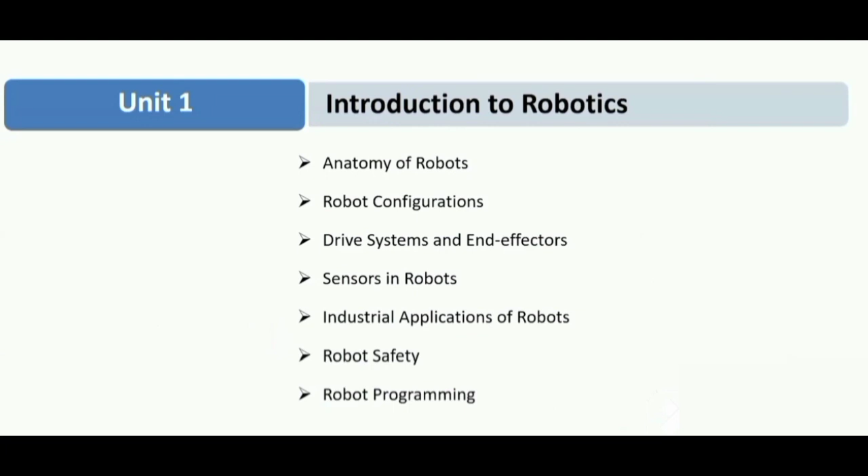Introduction to robotics, particularly focusing on the significance of the industrial robot in modern manufacturing industries. This statement holds good for any time: robotics is a technology with a future, and it's a technology for the future.

Hereafter, in another 5 or 10 years, even a robot could be placed in our home. We are going to interact with robots at different places - it could be in malls, shops, or sometimes in our home. So there are more possibilities and more scope for development in this field of robotics.

In this section, I will try to present how well it is progressing, what level of evolution has been taking place, and where we are going to place ourselves in this development. There is surely a scope for building our skill sets in different domains of our interest, and we can proceed further.

I'm sure robotics has a major requirement from mechanical engineers because they will be moving objects and interacting with objects physically, which needs to be taught to that robot. This requires some kind of programming and electrical aspect. We are supposed to be exposed to some electrical and electronic concepts, but we will be driving this total scenario particularly as far as manufacturing is concerned.

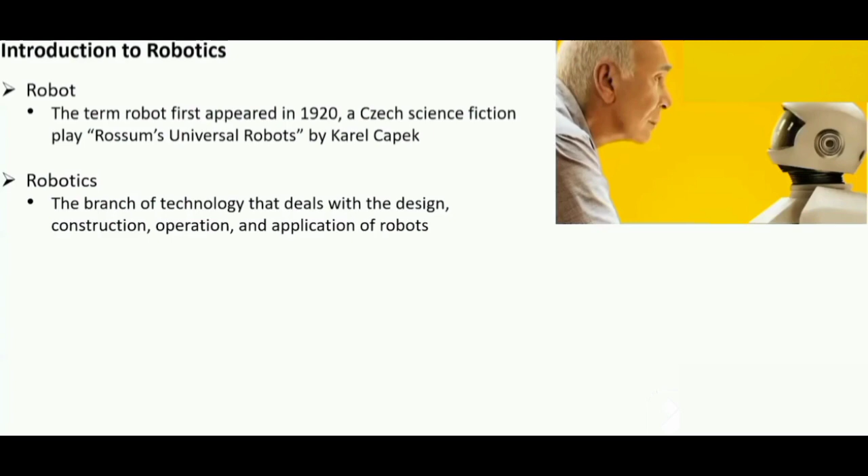So with the continuation of this, another writer named Isaac Asimov has declared some kind of three rules or three laws of robotics, which makes it clear how the robot has to be.

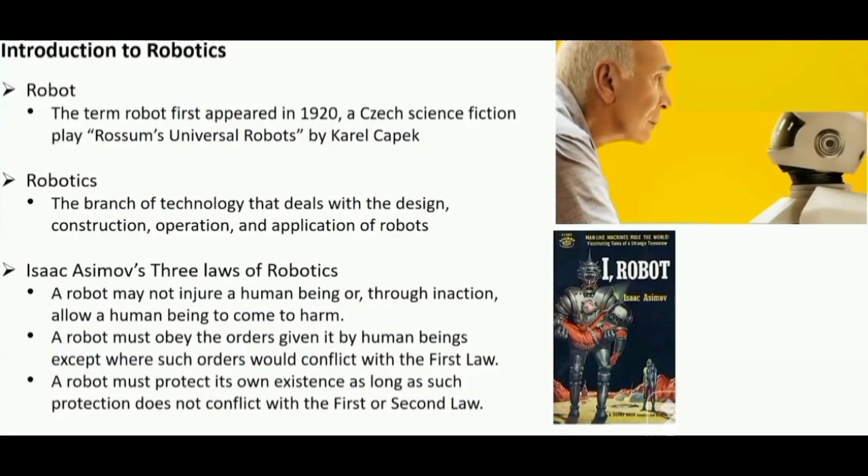So with this aspect in mind, the robot is progressing. The robotics technology is progressing. With that, plenty of robots have been deployed in manufacturing, and this too is considered to be a programmable machine.

I hope that you have all undergone, in the 5th and 7th semester, courses on manufacturing automation, where the CNC machines, NC and CNC machines, the machines will be coded with NC codes or programming, and it will be made to work for our machining purpose.

Can anyone suggest to me what is the need for using CNC in manufacturing? Particularly, why is automation needed? That's an inherent question. Why do we need to use CNC instead of our traditional methods?

Okay, good, very good. Good surface finish, accuracy, exactly. That is, manpower, speed up the process, accuracy, and also we need to meet up the demand of the market and the requirement. So this requires us to trade off between accuracy, quality, and time.

And it's supposed to have a better quality product in a cost-effective way. That's why the market requires exactly this. So it's going to be more cost-effective solutions. We are expecting cost-effective solutions in a shorter time, which avoids some kind of inaccuracies that happen with manual intervention.

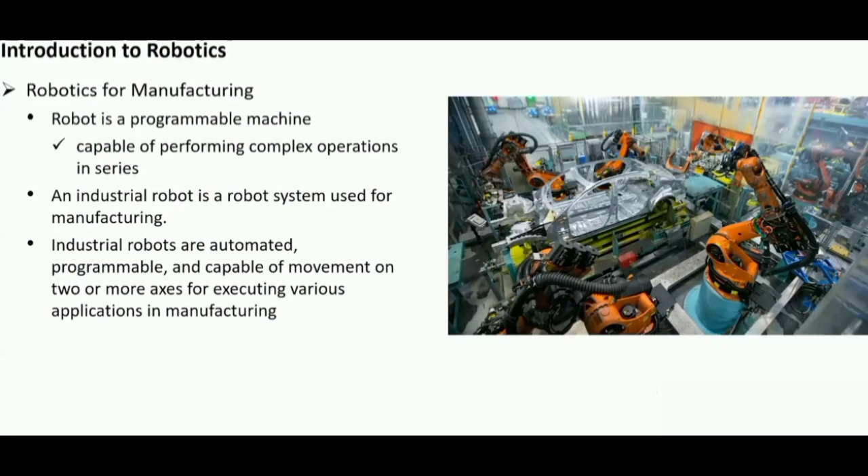So with that, we are going to have an industrial robot that is automated, programmable, and capable of movement on two or more axes for executing various applications in manufacturing. The robots could be placed in different formats. However, this course is focusing on manufacturing, prior to the simulation part. Robotic Industries Association is a very renowned institute in the area of robotics.

We are more focused on industrial robots, the robots used for industry requirements. An industrial robot is a reprogrammable, multifunctional manipulator designed to move materials, parts, tools, or special devices through variable programmed motions for the performance of a variety of tasks.

We need to recollect this statement as much as possible to justify it. The first part is reprogrammable, so it's programmable and can be reprogrammed, meaning it can be used multiple times with different kinds of programs enabled. The second part is multifunctional, meaning it can perform different functions like pick and place, welding, or any other activity depending on the task required.

It is particularly designed to move materials, parts, tools, and special devices. It's more like a material handling system, but with precision and accuracy much better than a human. So safety is a fundamental underlying principle, along with variable programmed motions, since different motions need to be executed for each part or task to be performed, for the performance of a variety of tasks.

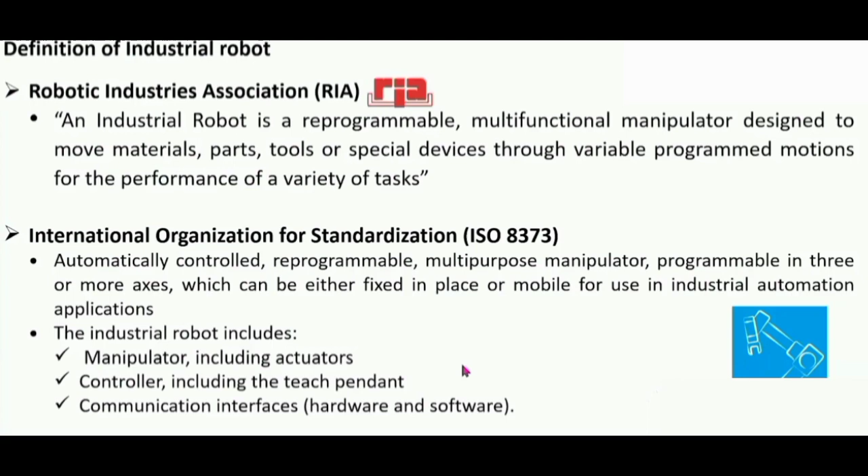That's the way we have to structure this robot. So in this case, okay, I can start up the presentation. Yes, okay.

I hope that I have convinced what a robot will look like. We are taught it's a very simple thing: a programmable machine that imitates the actions or appearance of an intelligent creature, particularly human. Wherever humans have been employed, we use some kind of automated device called a robot, because humans find it difficult to do things like welding or carrying heavy objects. There we need support from machines. So in order to qualify as a robot, four major elements have been considered.

This is going to be the simplest version of it, though a larger list exists. I prefer to have these four things. One thing is sensing and perception - simply, how we get information from the surroundings.

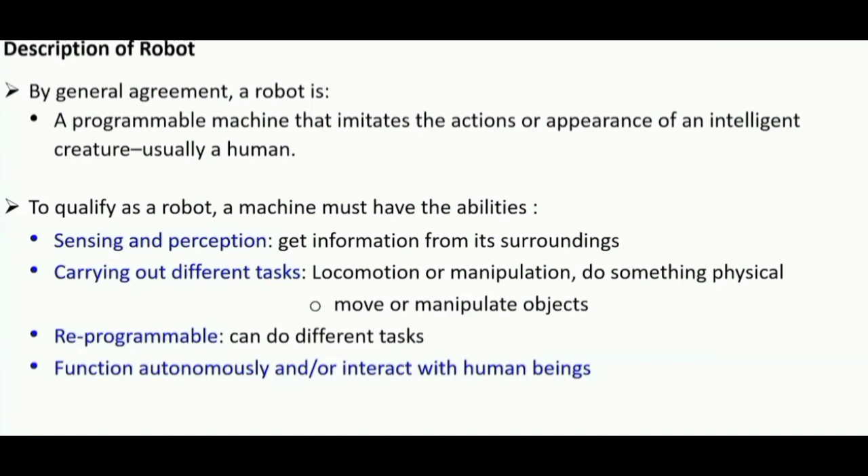So how will this robotic structure look like? I have provided a very elementary level of structure, but it will be predominant in most of the cases.

You can see that there is an environmental sensor, something called a motion planner. The other thing is a controller. This environmental sensor collects the data, processes the information, and gives it to the controller.

The controller operates the mechanical structure, like the arm, and within that there is a configuration sensor.

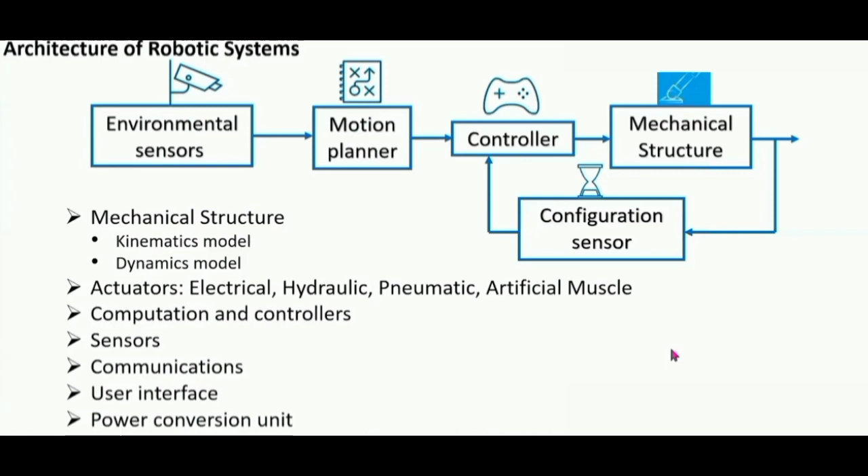As already discussed, now to ensure, in terms of the industrial perspective, any industry is looking for quality products and in a more efficient manner, without harming or without any adverse effect, with minimum time and minimum cost.

So in order to have a better benefit out of it, there needs to be better productivity. So much of our requirement for industry is concerned with one thing: it has to increase the product quality in terms of improving accuracy and repeatability, so that the quality of products will be saleable at the market and has a better rapport or branding.

The second one is how effectively they will be improving efficiency so that their workers or employees will be comfortable and able to undergo any dynamic situation, in a very safe and environmentally viable environment.

And we need to reduce the cost by reducing wastages in terms of scrap, reducing our in-process inventory, and reducing labor cost. The very important critical factor is reducing the manufacturing lead time.

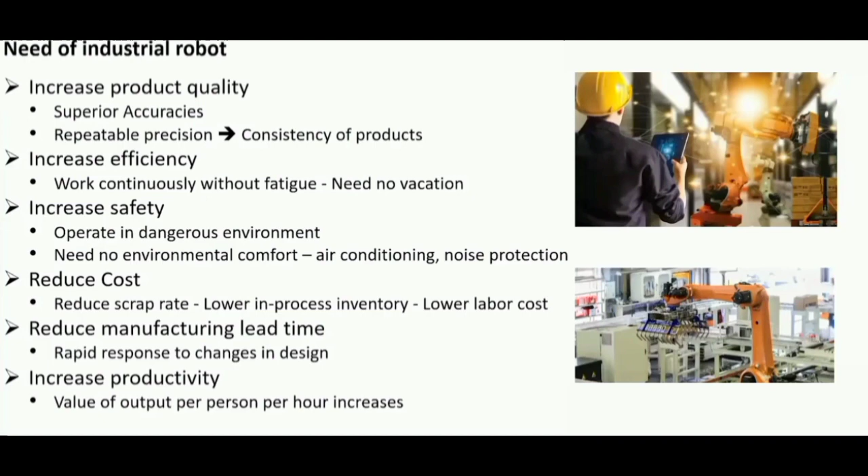We are also looking for the replacement of repetitive, ergonomically difficult, physically demanding, and sometimes dangerous work. Wherever humans undergo fatigue in nature, we can deploy a robot, which is a machine that works 24/7 on requirement, but the human cannot do because they have their own fatigue and physical conditions.

So robots are preferred wherever dangerous, dirty, dull, and difficult environments will be helpful for humans, in terms of automation purposes, or supporting in terms of assistance or augmentation, or it could act autonomously also. Some industries may not need human intervention for night shifts; all the machines will take care of themselves and work on, and whenever we require, we will be on the regular routine time and take care of it.

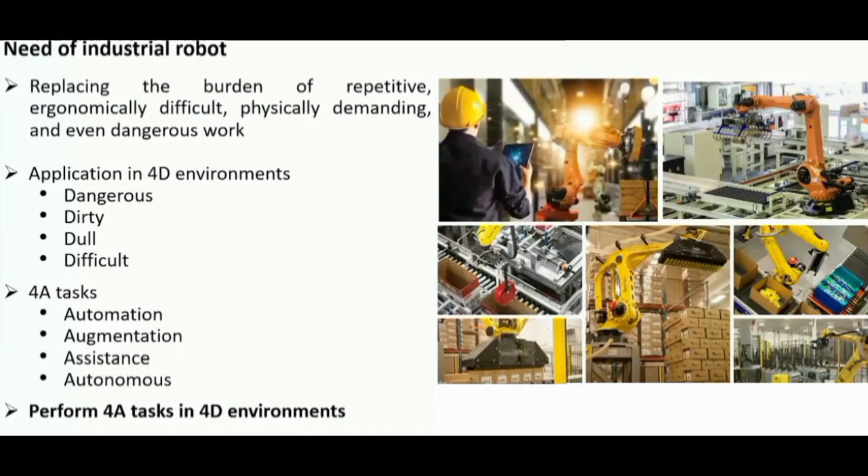So we like to perform 4A - automation, augmentation, assistance, and autonomous tasks - in a 4D environment, meaning dangerous, dirty, dull, and difficult. To have a replacement as well as betterment of human value and human work, we'll be preferring the industrial robot.

For example, assume there is a painting section. When you are deploying or employing a human worker in a painting shop, it's going to be a very enclosed environment and they are subjected to issues like respiratory ailments, maybe as a result of this kind of painting shop.

So there's going to be a booth available for interior and exterior, and the robot will be placed appropriately to do its work. Here the productivity will also improve, and the human also benefits more in this kind of category. So certainly this kind of environment prefers to have the industrial robot. Surely the quality also improves, and the amount of paint spent on this process could also be reduced.

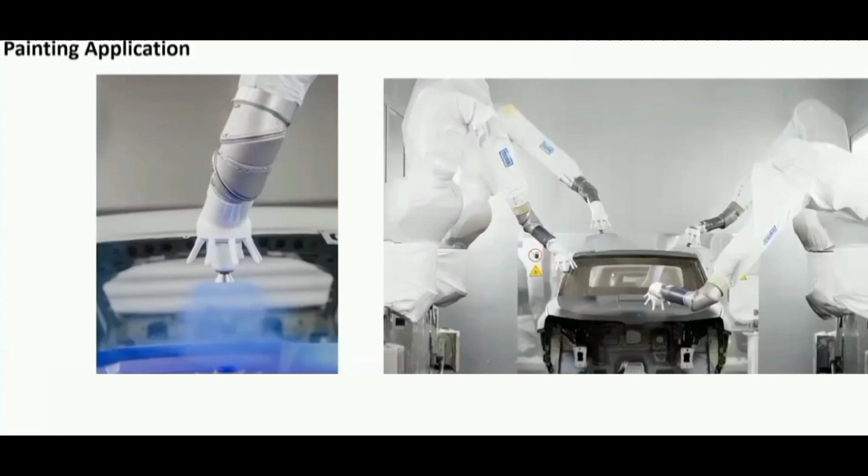Now that's part of why we are using a robot. Now we are going to set ourselves into a global environment and try to see what the statistics are. The International Federation of Robotics report of 2022 collected data in 2021 and released it in 2022.

This is the growth of installations in terms of thousands of units. You can see there's a huge increase, particularly in the Asia and Australia regions, because of the increase in their productivity as well as the manufacturing sector. Annually it has been maintained more or less. This may be the recession area and also the COVID period, where we were slightly lower, but it still exists. Even in this pandemic environment, robots have been supporting us in manufacturing, and whatever support was required has been extended by this kind of automated industry.

So this is a very simple arrangement. You can see the consistency has been maintained in most of the European countries, and because of this increase, they are also slightly increasing their abilities. Whereas as far as America is concerned, they have already established some things, but they are sustaining it.

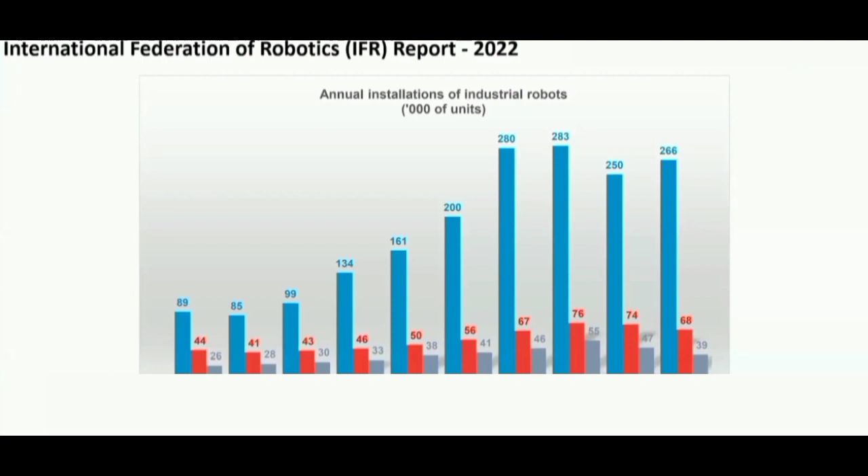So this is an environment where we can place India in this area. We have enhanced a little bit, but compared to China, Germany, or Korea, our usage of industrial robots is minimal. But in future, as the country grows, we are looking for more efforts on manufacturing. So when going for high precision manufacturing, we need support from industrial robots. Purchasing an industrial robot alone is not sufficient — we need to build capacity. You, the future engineers, are going to handle these kinds of robots in new digital manufacturing environments.

And the other part is which sector of manufacturing will dominate. Here you can see the electrical and electronics companies, like chipboard manufacturers or any process manufacturing, which require very precise positioning and precise assembly, needing more dexterity and fine motion where human skills are limited, will go forward with industrial robots.

The other evergreen segment is the automotive sector, where they have started using industrial robots because of market demand, and precision and mass production requirements are driving it. The next is the metal and machinery part, and there is scope for the food industries, chemical industries, and others too. These are very authentic evidence.

This is a report for 2022. Still, there can be a huge scope for improvement, and the installation is going to improve a lot.

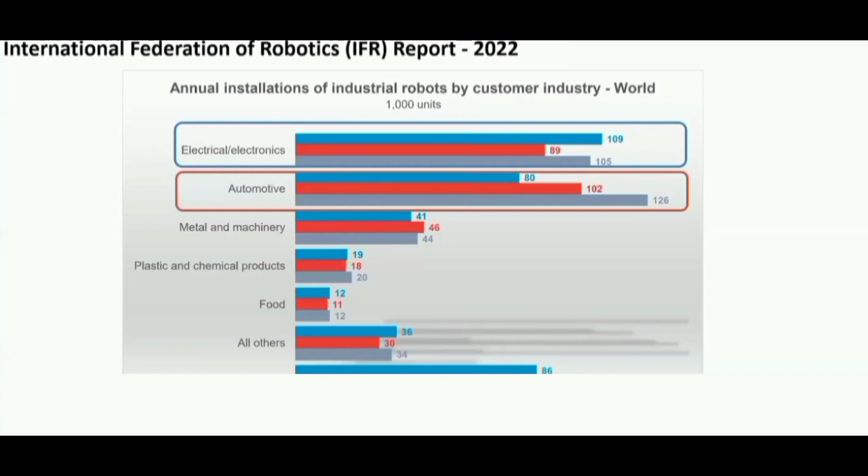Very quick glance of it — whatever we have seen in the video, the same thing: 76% of global installations are in countries dominating manufacturing, particularly China, Japan, USA, Korea, and Germany. Out of which, China is moving on with 44% of total installation in 2020, which is going to be 58%, more than Europe and America have. So they are growing in a very accelerated manner, targeting the manufacturing hub, and building their capacity in terms of automation.

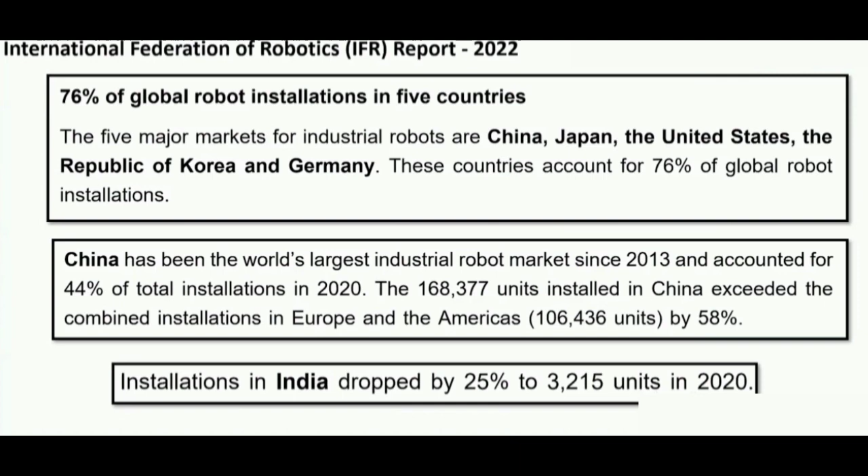However, the government has been taking up some effort and making toward new accelerated programs on robotics. I think you have heard about some kind of initiatives on the drones as well. So we are identifying some of the key areas, and we are going to equip ourselves towards it. So one of such programs could be of this online courses. It doesn't satisfy all the skill sets, but it provides you an awareness and a hands-on experience that makes us move from this place to the next level.

Very quick, important inferences. I have pointed out around 10 points here. Please listen carefully. That will make you move forward from here onwards.

The automation is driving the job creation. Okay, so automation is a key area coming up. However, the human labor will remain competitive based on the skill set we have, not in the traditional way, but also we need a digital way of doing it. There is a new skill set expected in the industries. If you are prepared for it, the human labor is still competitive.

Most experts in the three industries covered in this IFR report is mostly on manufacturing, logistics, and healthcare. Manufacturing is a major hub. Even the products produced for logistics and healthcare will be done at the manufacturing industries. So it's a very major domain in which we are looking for automation as well as precise, accurate parts. And we are going to start working along with the machines.

Hereafter, there will not be any barrier between that. We will start working along with these machines, in the sense the robots.

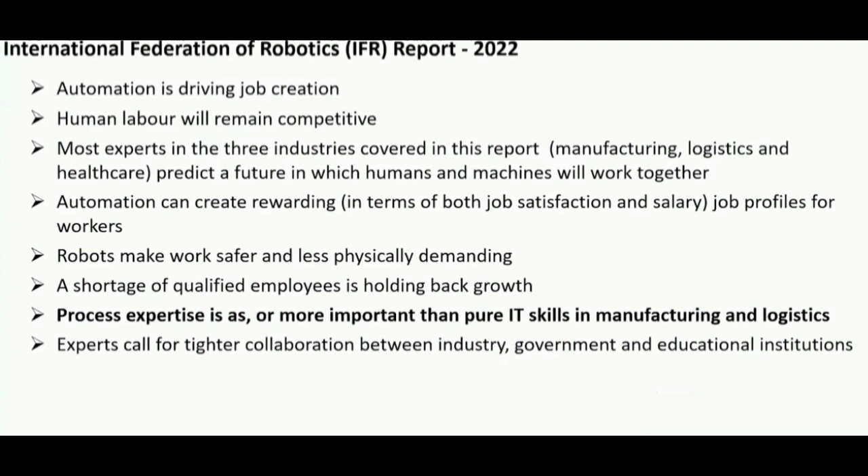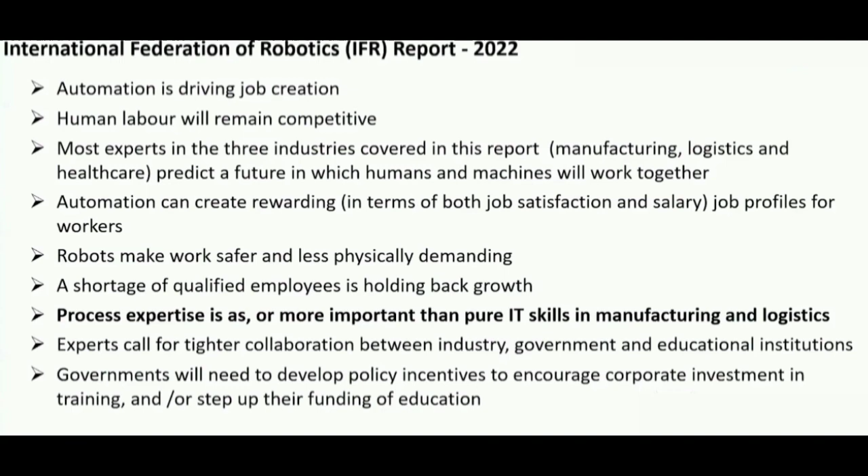The governments will need to develop policy incentives to encourage corporate investments in training and step up their funding for education. So one of the training institutes, Skillsonics, could be one of the persons taking this robotic initiative, and they are making this happen. So a more collaborative effort is expected that makes us drive to a new beginning.

Very simply, we are looking for the betterment of the manufacturing scenario in terms of efficiency, starting from raw material to packing, where the objects have to be handled at all places. And the robot can work 24/7 for continuous production, so that productivity could be improved upon. And the equipment will be highly flexible in terms of what functions we need to do; appropriate programming may be required.

The manufacturers start preferring robots because there is a lack of skilled labor now. At the same time, the market demands more precise, high quality products. On the competitiveness front, they need to go for this kind of extension activities.

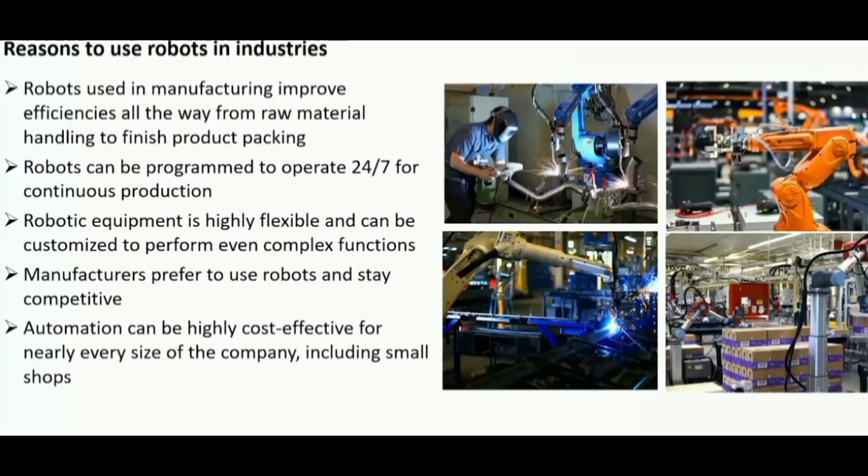So how well we are going to use these robots in a different format, and new innovations or improvements are expected out of you, for small scale industries to large scale industries. That will be one of the reasons we are here.

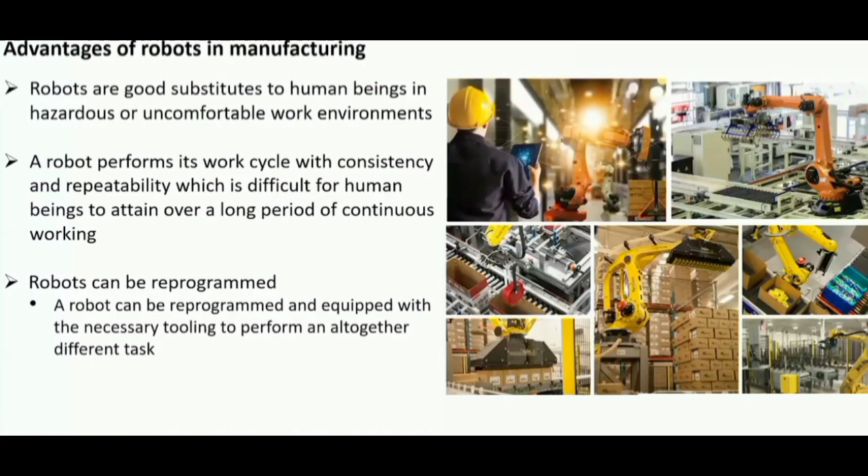So already we have touched upon these areas. We are focusing on a very simple thing: how well we are going to effectively use the human value, and how effectively we will extract the work from the machines, so that cost effectiveness, safety, and stability will be improved upon.

When talking in terms of manufacturing, we have a wide variety of manufacturing processes involved, and most of the processes can use robots, subject to how well it would be used based on the demand, based on the complexity of it. We need to devise appropriate programming or planning, whether we are going for a robot or can we do it manually.

It's more of a decision making process, which requires a systematic investigation and systematic study may be required. So for this we cannot directly deploy the robot. Instead, we will be seeing how well it will work if it is deployed.

That's why we are more focused towards the simulation part, where we can visualize all the working of it using a virtual environment, through the use of simple CAD packages or any robot-based packages, and we can see how it works. Upon satisfaction with the performance, we can start deploying it, and the deployment phase will also be reduced because of the simulation.

That's why this course has been more focused on robotic simulation for manufacturing. Our intention is more on the simulation part, that too a simplified version of robots. However, that could be extended to complex robots as well.

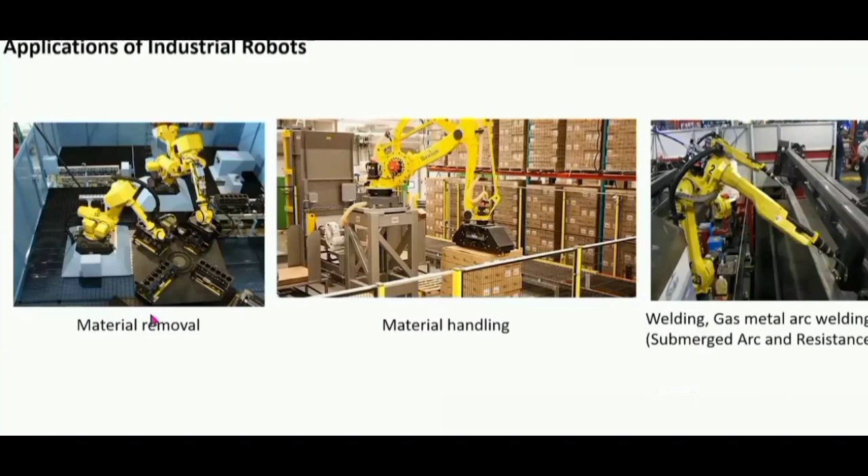We previously showed material removal, material handling, welding, and here the assembly part. You can see that in the automobile environment, there is a huge lineup of robots. All these robots need to be maintained, programmed, and coordinated so that the total flow is more effective.

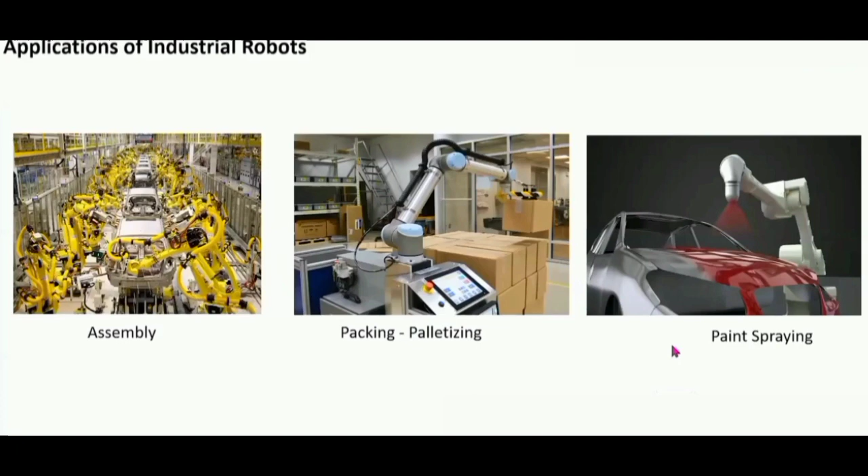So we have a wonderful opportunity to equip ourselves and be exposed to this environment, either automating or using a robot for any application - assembly, or maybe packing, or maybe paint spraying. So it could be devised for different aspects of it.

As one of the questions has been asked, what are the limitations of using robots? Surely there's a chance of increase in unemployment rate for existing skill sets, but there is a wider opening for new skill sets. So we need to equip ourselves for this new requirement.

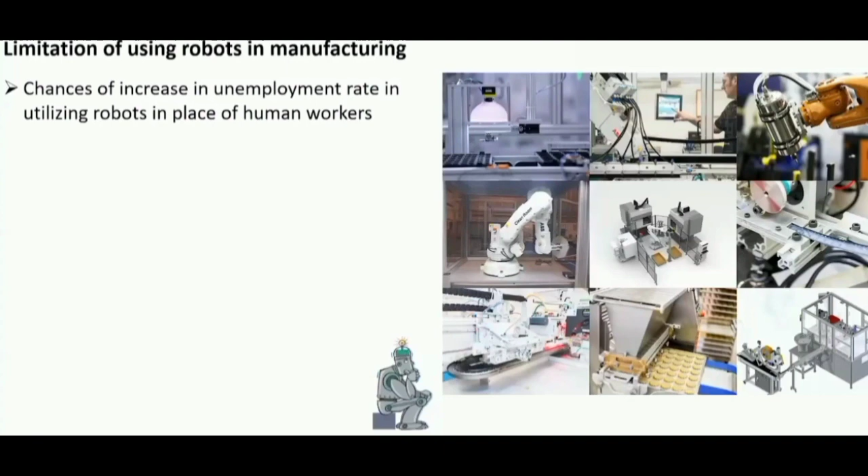This is a more dynamic environment, so how well we are going to adapt to these dynamic requirements matters. The cost of robotic automation may be difficult for an MSME. Small scale companies cannot afford it in terms of financial budget, and there will be regular maintenance required. If there is improper planning of the robot, that's a huge increase in expenses.

So there is a very wide scope for our planning and simulation, followed by execution. That requires some kind of skill set in terms of planning and the simulation part.

Humans execute tasks with creativity, decision making, adaptation, and job learning. In the sense, humans have better learning ability and better response to dynamic environments. Whereas the robot is concerned, it has been limited to that programmed level alone, where always the human will be dominating the robot. That's no doubt about it.

Employees dealing with robots require proper training, which is an additional cost for the company. Surely, when moving to new transitions or new developments, we require some kind of skilling. Skilling requires a training component, and that is also a small cost involved for the manufacturers. However, there's a need of the hour - we need to go for changes, adapting to the changes for a new beginning.

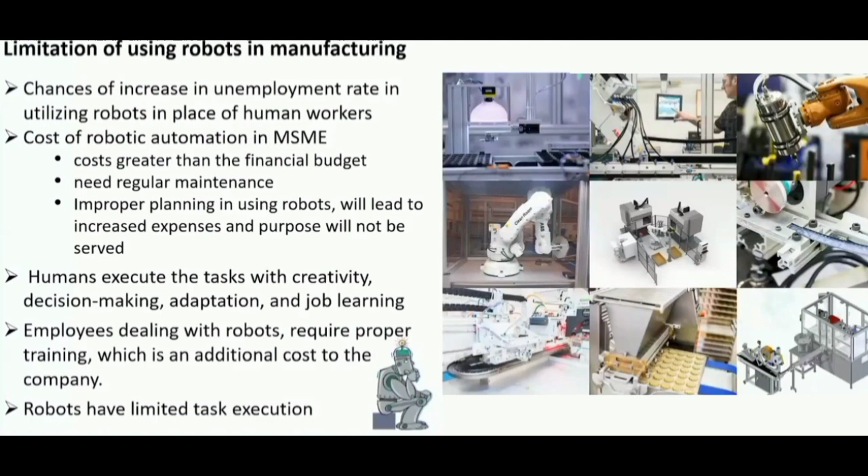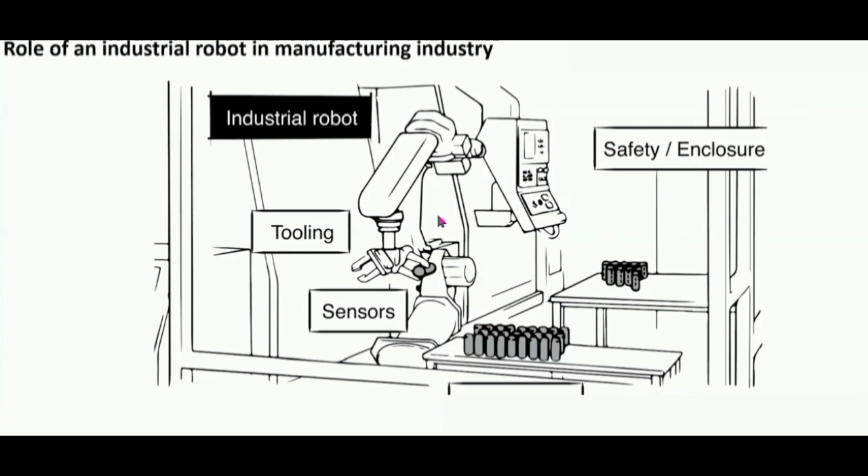Normally a human will be using this component and placing it on the CNC machine. It's a normal environment. Whereas instead of that, if a robot will be there, it requires some additional things like change in the tooling part. You may require safety enclosures, part feeding mechanisms, like what total automation is considered. So you need part feeding mechanisms, some sensors, and how well it is integrated. That makes sense - the production time will be reduced so the rate of production increases in a better form.

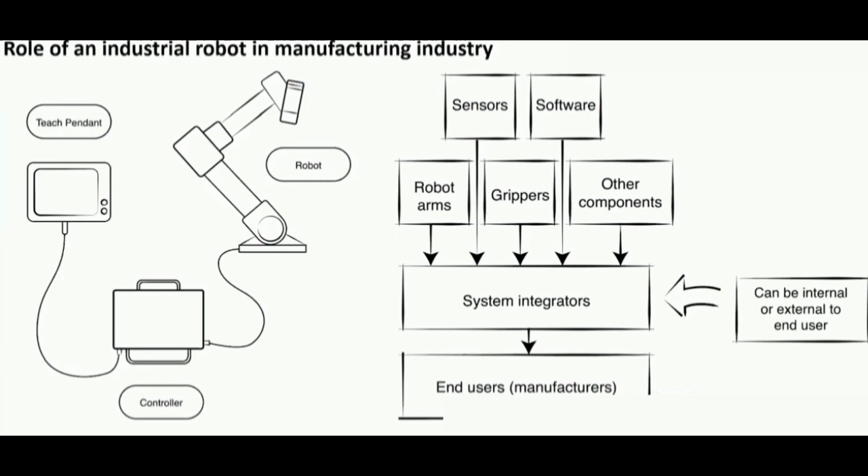So quickly wrapping up whatever we have done, we are moving to the exact robotics way of learning, which requires a little bit of terminology we need to work on. First thing is robotics is the science and practice of designing, manufacturing, and applying robots - how well the robots will be designed, manufactured, and how it could be operated. That needs to be done.

The next one is the manipulator part. It's a machine which consists of a sequence of joints - links as well as joints, which will be moving, grasping the objects and moving it. And we are looking for the autonomy - what's the level of autonomy we are going to have, and how well the intervention of the human will be reduced.

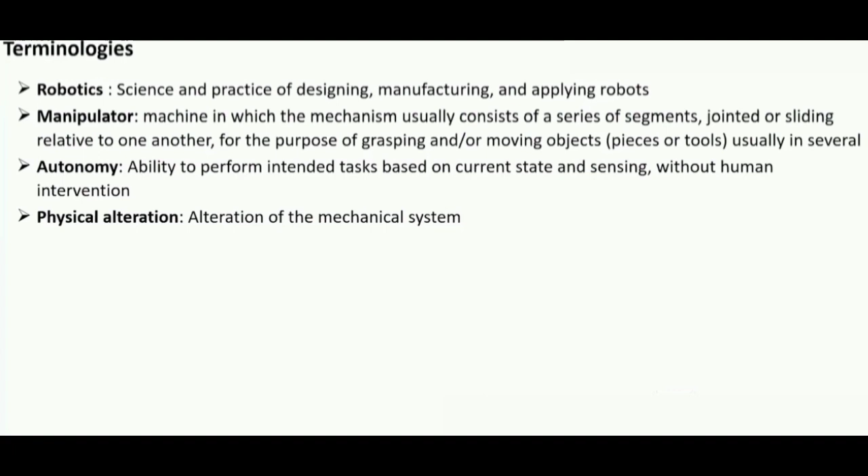The next one is physical alteration. So the robot will have end effectors, which requires a change of tools. Suppose if you are looking for pick and place versus welding, we need to change the gripper - instead of a finger gripper to a welding torch. So a full physical alteration may be required with the end effector part.

It's reprogrammable - in the sense, without changing a physical alteration, we will change the execution mode. That's called reprogrammable. Multipurpose - by changing the physical alteration, we end up with a different task, that's what multipurpose means. As a whole, the industrial robot is an automatically controlled, reprogrammable, multipurpose manipulator, programmable in 3 or more axes, or mobile, for industrial applications.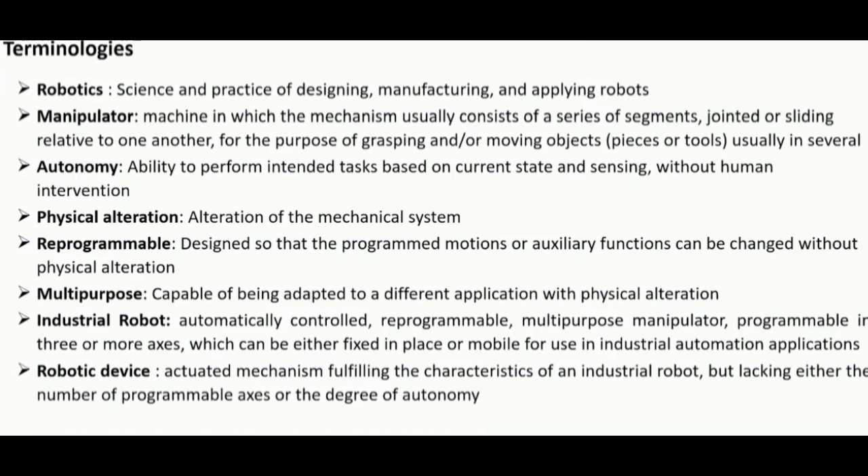Sometimes there will be devices we call robotic devices. It will be more or less a mechanism. It will meet some of the characteristics of the industrial robot, but lacking in the number of programmable - the ability of programmability and autonomy will be affected. Then we call that a robotic device.

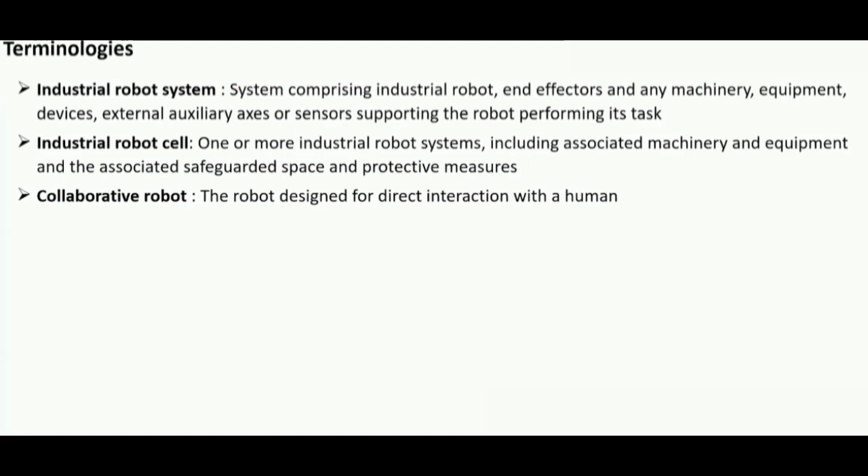The other terminology coming up is the collaborative robot. This robot is designed for direct interaction with a human - in the sense, together, the robot as well as the human work together to execute the task. That's considered to be a collaborative robot. In future, it's going to be normal.